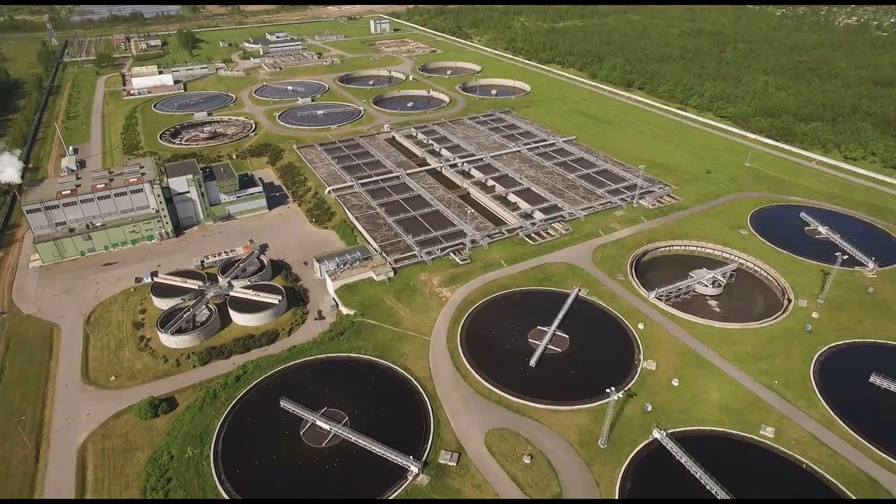AVEVA Software Solutions Unified Operations Center is up to the task when it comes to helping public works departments meet their challenges by enabling the power of actionable intelligence through consolidated systems, delivering one version of the truth. Here is a perfect example of what's possible when you go beyond SCADA from our endorsed partner, Wunderlich-Malec.

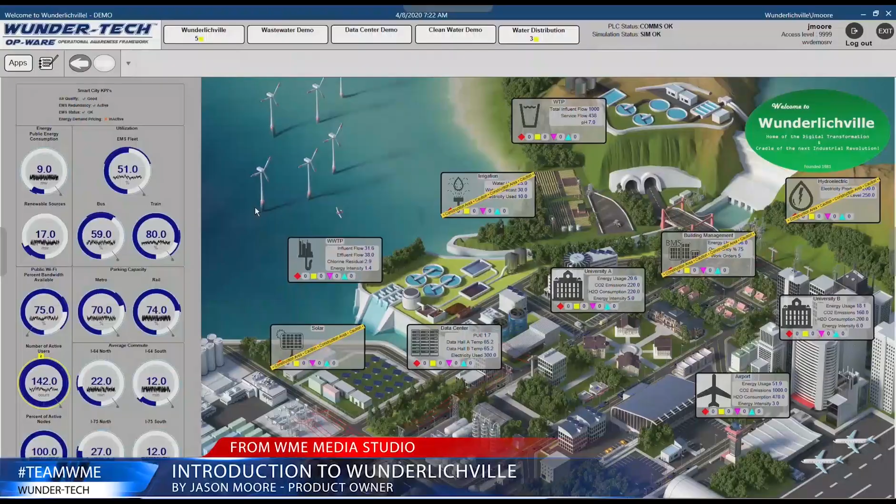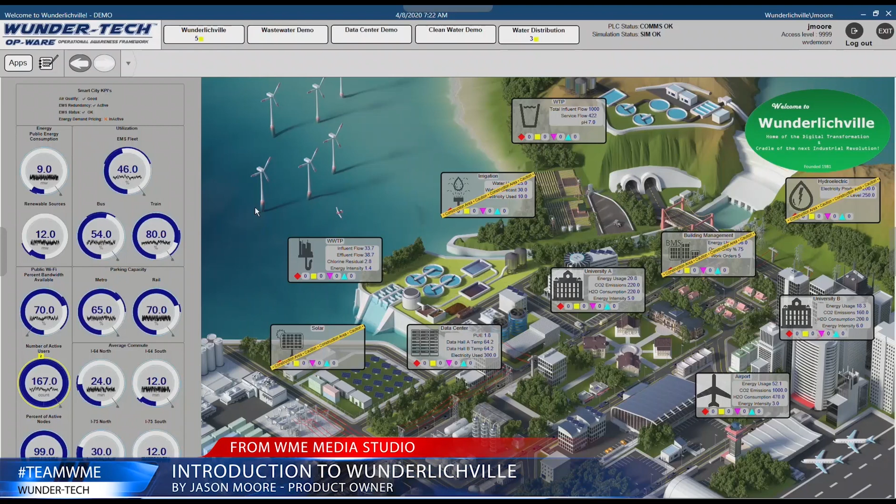Hello and welcome to Wunderlichville. Wunderlichville is a virtual demo that Wunderlich-Malec Engineering has created to highlight our Wunder-Tech libraries. The welcome screen here shows our smart city, and the various badges that are displayed here represent the different silos that could be a potential in a city.

With Wunderlichville, we break down those silos of information. We create a system of systems where the information is shared electronically and aggregated. This sharing of data allows a transformation of data into information. Information allows intelligent action to be taken, increasing the efficiency at which the city operates.

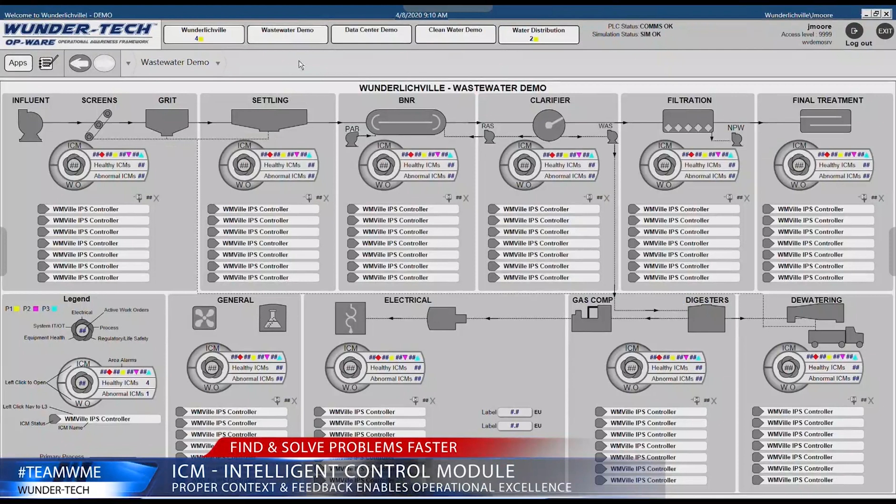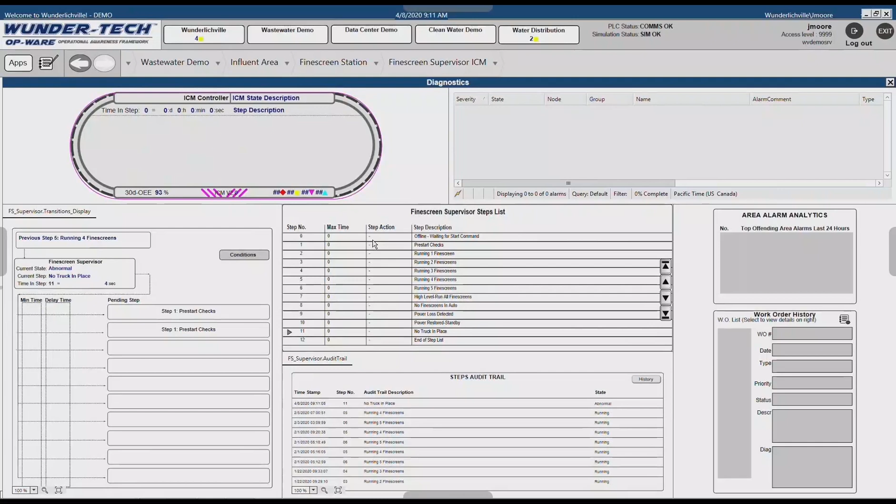Let's look at our wastewater demo to see an example of what our advanced diagnostics look like. We'll go to our fine screen and look at screens. Let's induce a fault and see how we diagnose it. I'm going to put the truck out of place, and then we'll go and look at the diagnostics page and the condition steps. So right now, in order to return to pre-start checks and to restart the fine screens, I either need the truck in place or the truck in place bypass active.

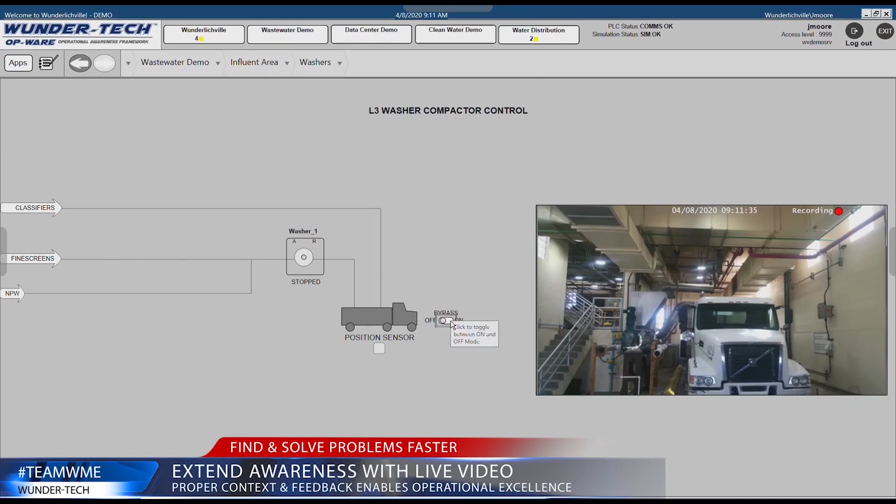Let's go activate that bypass on the washer screen. Here we can see through the live video that there is in fact a truck in place. Let's go ahead and initiate the bypass. Notice the supervisor is still showing an abnormal state and that none of the children have started.

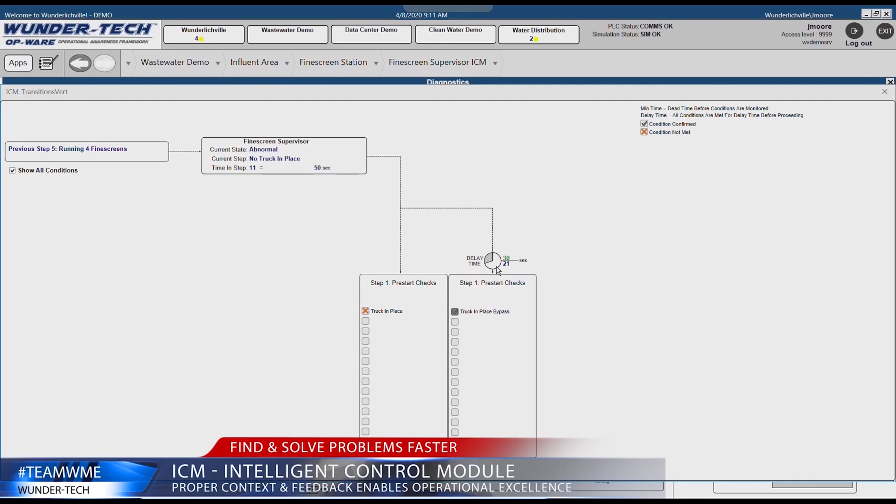Let's find out why. As you can see, the condition is true, but there is a delay timer on the step transition. Another 10 seconds and we can see what happens. As we can see, the state has changed to running and running 3 fine screens. So you can see how the ICM works to guide the operator through diagnostics in solving problems.

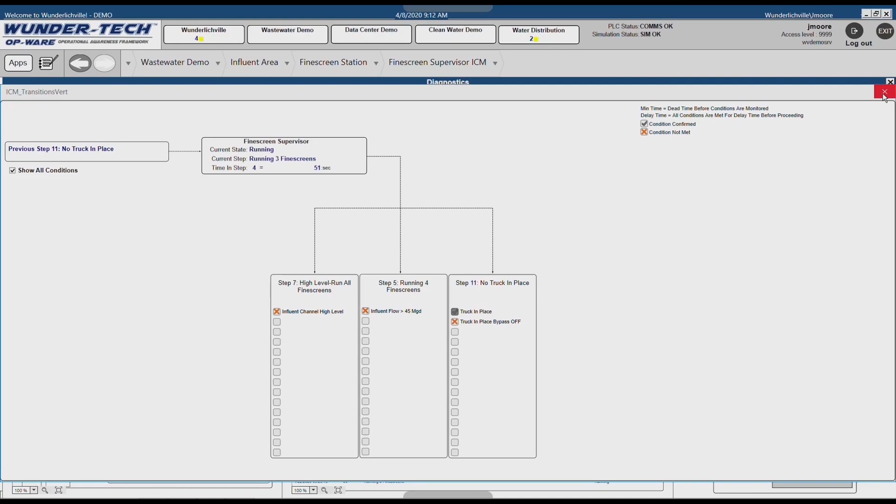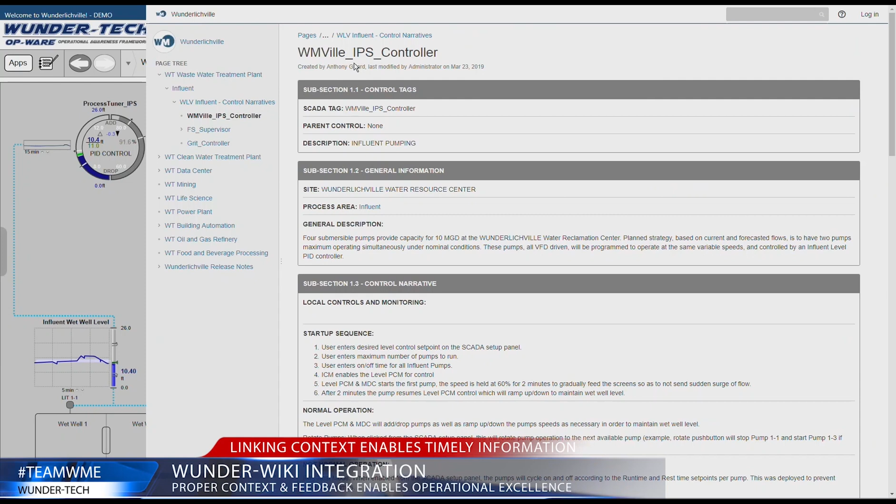Wunder-Tech Operational Awareness Framework also brings an information portal with it. From here, the influent pump station, I can hit the right-hand slide in and we can see that there's a wiki style page that has all the pertinent information operations would ever want on the influent pump station, including P&ID drawings or any other document that the organization wanted to hold there, as well as the applicable standards that make up the system.

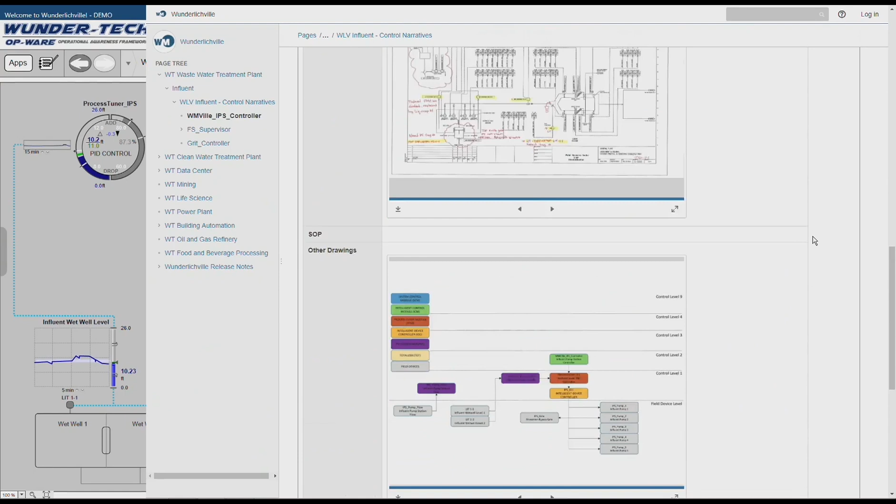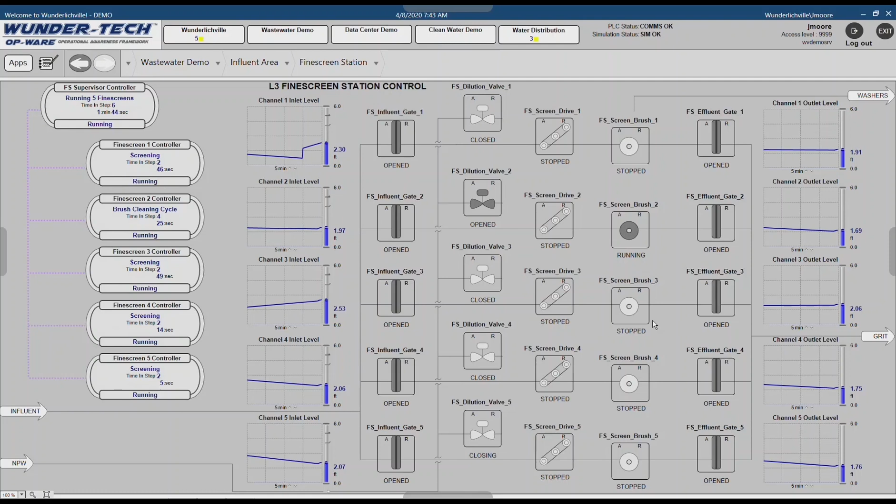The nice thing about this is as I change areas, I can hit that same slide in and now it brings up the finescreen area because I'm in the finescreens. So like everything else, this is context that changes with the area or with the focus of the operator, giving them information at their fingertips that's relevant to them at the time they need it.

Let's use our water distribution demo to demonstrate the map app and GIS integration. Here you can see a map of the Las Vegas Valley and a couple of the water distribution pump stations that are on there. We can zoom in and we can see different details based on the clutter or declutter of the zoom level we're at. So at this zoom level, we get a little more information.

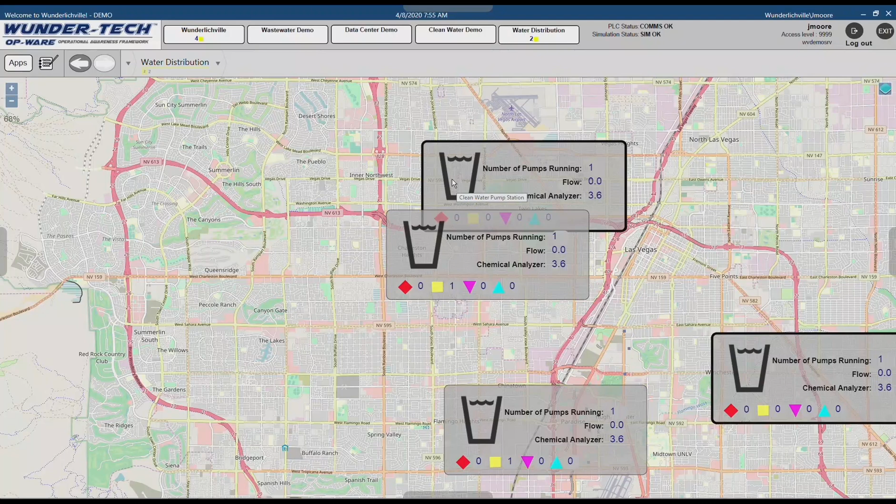We can see the alarm borders. We can see the number of pumps running. We can see data from the chemical analyzer. Zooming in further, we can see the chemical injection, the service flow, the discharge pressure, and the reservoir level. Ultimately, we can click on it and get the schematic numeric display that everybody is used to. This is how Map App and GIS can assist your operations.

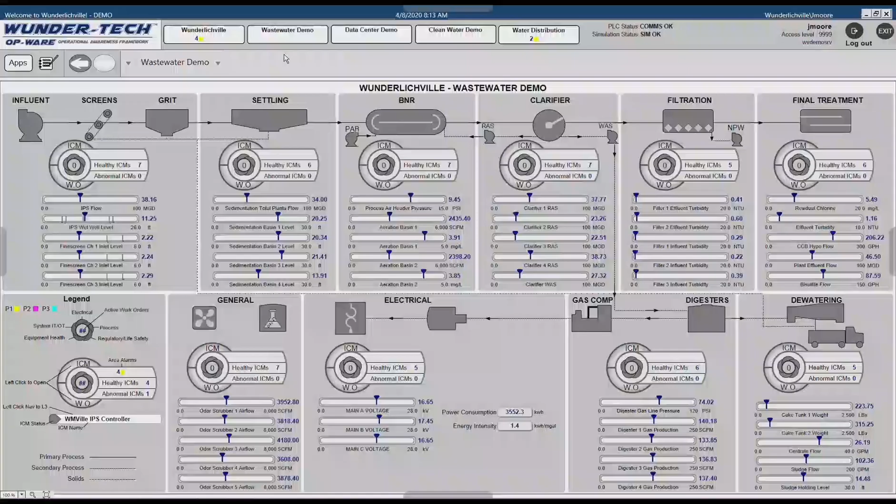Let's talk about how Wunderlichville integrates with other applications. We're going to look at IntelaTrac. We're going to go to our pump station once more, and we're going to look at the fuel levels and the run hours of the generator. They are manually recorded. Normally, an operator would go into the field with a handheld device, observe the fuel level, enter the fuel level into the handheld device, and enter the run hours. Then that would sync with IntelaTrac.

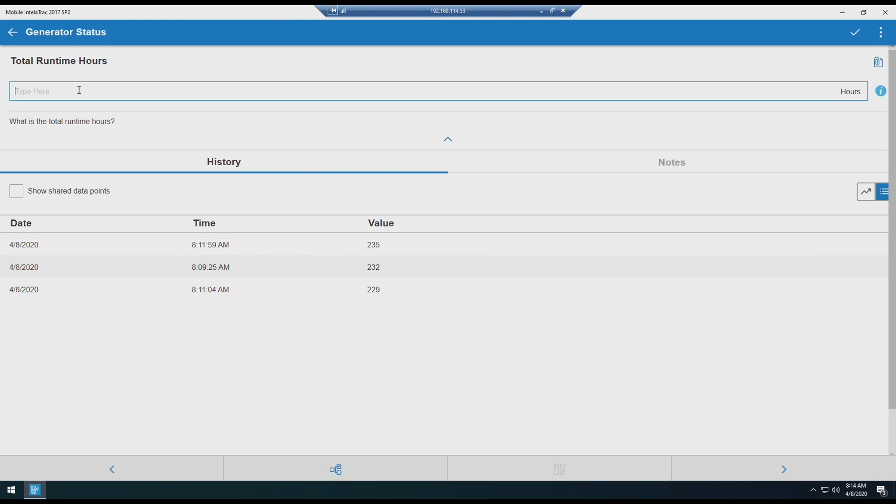Instead of a handheld device, we're going to use a VM that's set up to do the same thing. We'll go to Procedures on Demand, the Generator 1 Daily, and assign it to me. This will walk me through the procedure. First is the fuel level. We're going to set it at 3/4 full, hit the next button, and then the run hours we're going to set to 237. That completes the procedure. We confirm the entry, and then we sync.

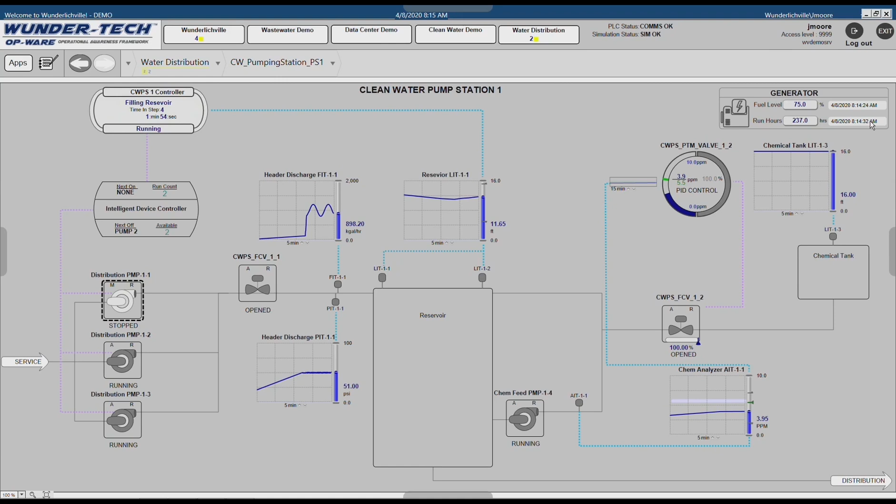Here we see the values have updated as well as the date and time they were recorded. This brings mobile rounds and stranded assets back into System Platform where they can be historized and analyzed.

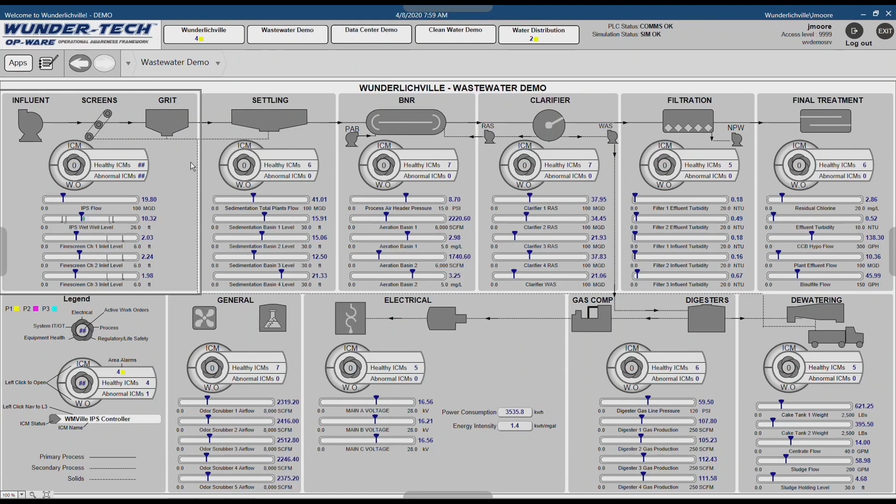Let's take a look at some of the data and diagnostic tools that are available. We'll go back to our wastewater demo. We'll drill right down into our influent pump station, and with a right click, we'll bring up the diagnostics on our influent wet well level.

Here we can see IO information, area alarm information in real time, area alarm analytics, work order history, and our logbook entries. Here we have the Insight pane. This is actually the Insight application running in an OMI pane and allows the operator to pan and zoom the same as they would on any other trend client.

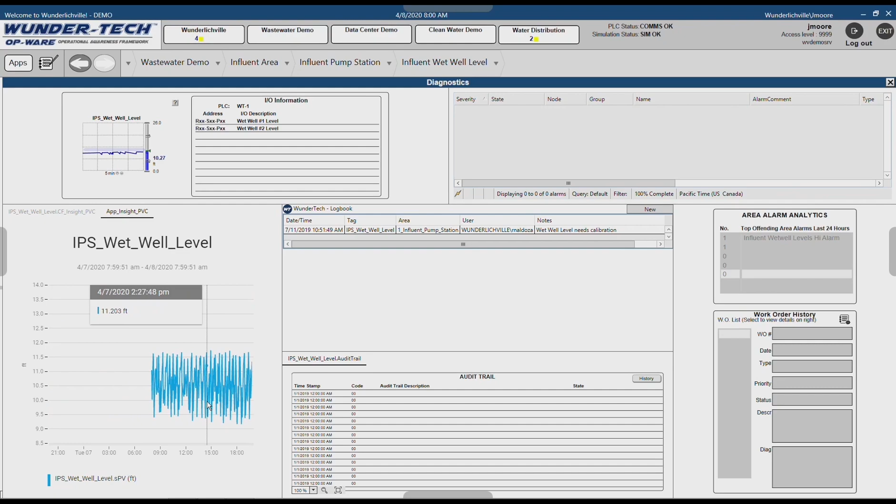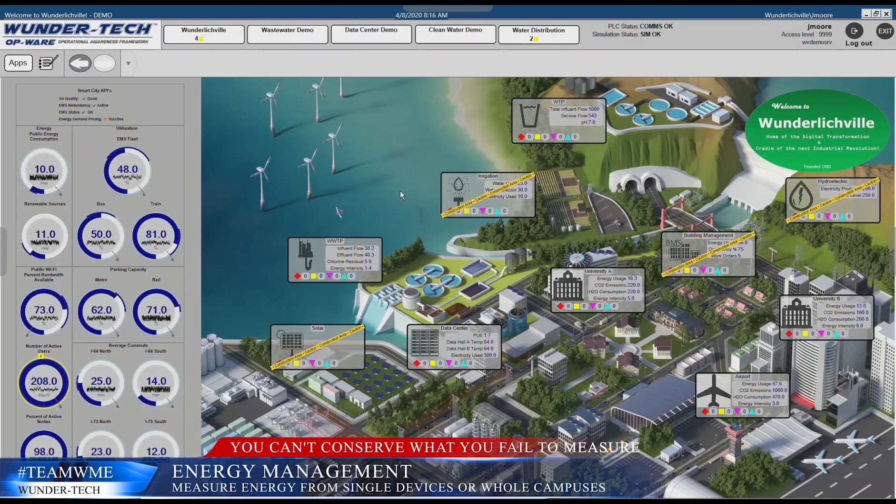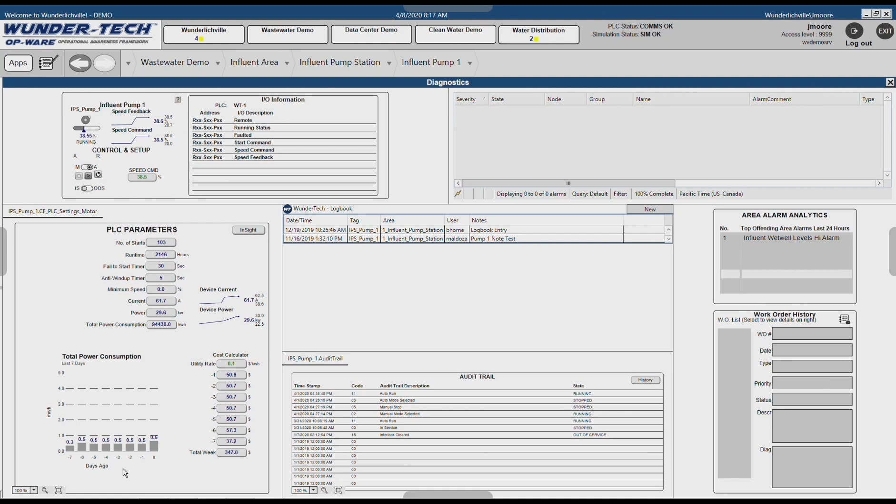Let's take this opportunity to talk about Wunder-Tech Operational Awareness Framework and how it can help with energy management, whether it's at the device level or the corporate level. First, let's start with the device level. We'll drill down into our influent pump station. We'll right click, bring up the diagnostic page, and here we can see a bunch of information about how the device is performing, what power it's using, what utility rate there is, and a historical power usage over the last 7 days. Now let's look at the corporate side.

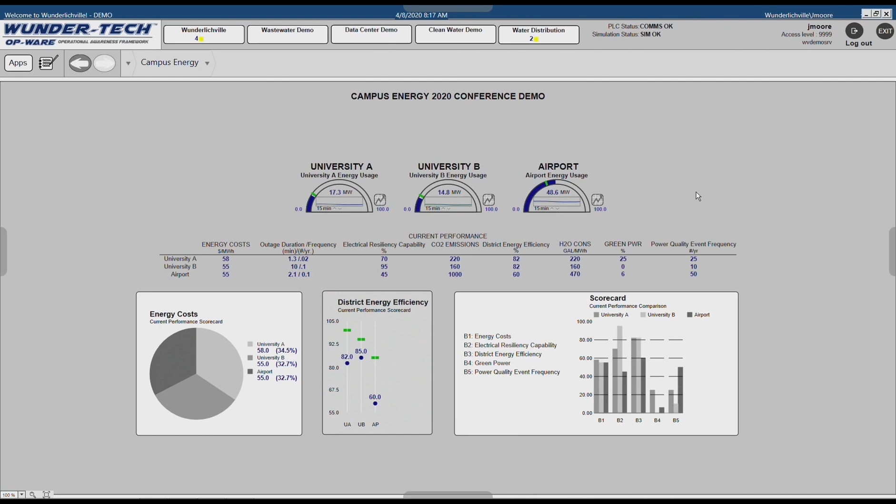Thanks again to Wunderlich-Malec for clearly illustrating the power of systems unification and the reality of going beyond SCADA. As an operator of water or wastewater utility, not only are you required to provide reliable and affordable services, you must also be compliant with government regulations, ensuring your operations are sustainable. Public works departments require more efficient methods of engineering, optimization of energy supply, and contextualized monitoring as they seek to expand availability of services to the general population at an affordable price.